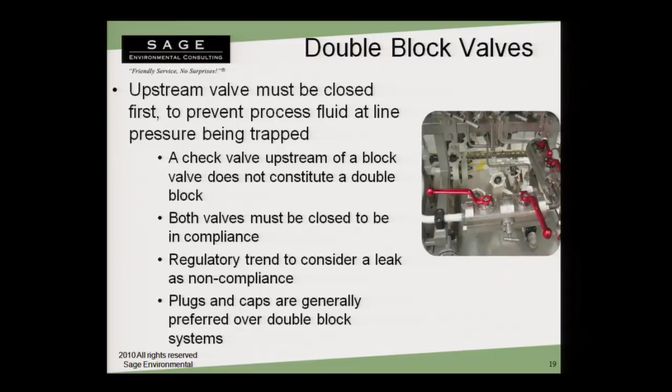The sample systems, we didn't hit on this hardly at all. First off, it's required only for routine sample systems. EPA does not define routine in any of their LDAR rules. Seems an oversight, so that's up to you to do.

Most people say routine means it's a regularly scheduled sample with a minimum frequency of X, and I've seen that X go anywhere from weekly to annually. But there's no doubt that if you have something that's regularly scheduled, but you only do it once a year, you don't need to waste money on controlling the flushing from that.

The other thing that's interesting about this, you're supposed to capture flushing emissions. So by flushing, purging, we're talking about emptying any dead leg line that would not represent current operations.

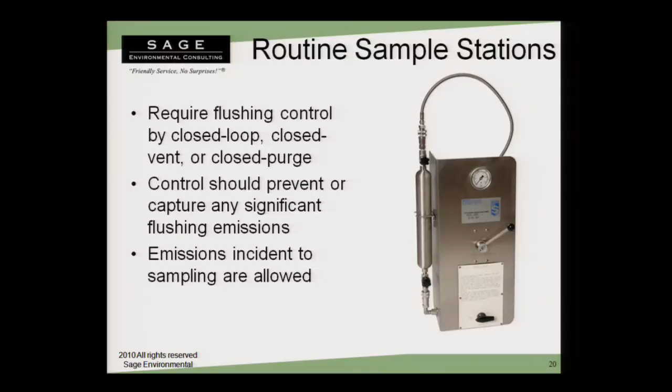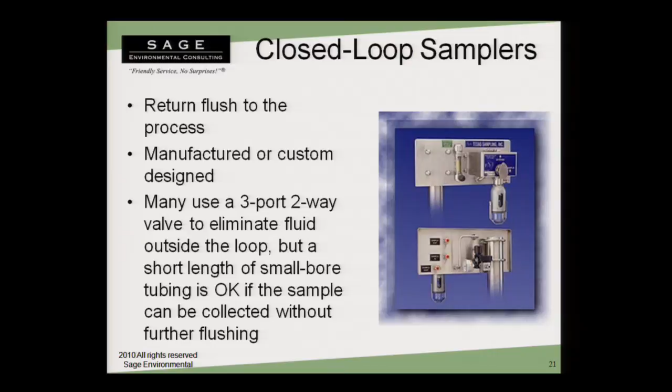So some examples: closed loop, you can get the big fancy panel things, or you can have a homemade one that just goes from the upstream side to the downstream side of a control loop, across a control valve, or across a heat exchanger, discharge back to suction on a pump. Anywhere you got a pressure differential, you can make a closed loop sampler. One thing, we have concerns in a minute.

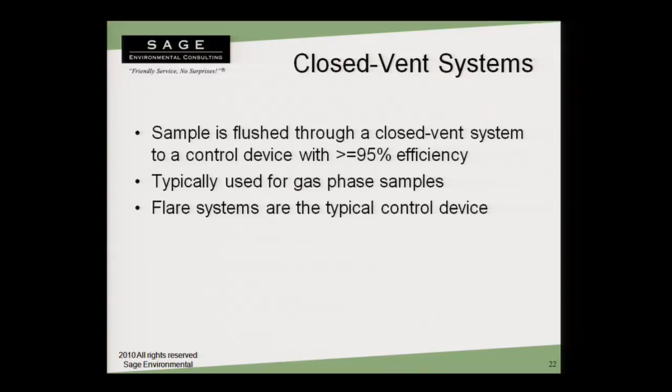Closed vent systems, you're going to flush to a control device. And the vast majority of those are gas samples being flushed to the flare system, so usually with a bomb. So you fit a bomb in place, you flush through it to the flare, you turn off, pull everything apart.

Closed purge means you got some kind of a container that you're going to purge to, and you're going to keep it covered at all times when you're not sampling. Then when it starts getting full, you're going to take it somewhere in the plant and rework it, get it back into the process. So you're going to recover it. So this is allowable.

We like to recommend, if people are going to do it, to at least invest in this kind of foot-operated kind. So you got a hinged lid and a foot-operated deal, which is good. The guy's got his hands full anyway, so he can use his foot for that. But the good part, as soon as you walk away, take your foot off the pedal, it closes itself. An open bucket being used as flushing control is not compliant closed purge.

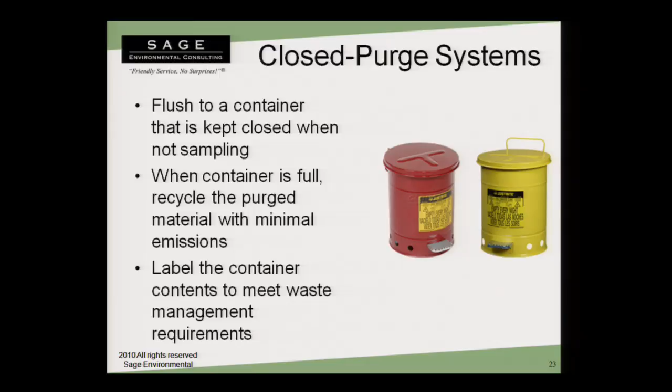So some concerns: bypassing or modifying one of these. One of the things we see is a closed loop system that's doing a good job of flushing, but then they'll put 10 feet of tubing on the branch off the closed loop that's not free draining, and so they've got to flush that. So that's making your closed loop non-compliant.

Purge containers open - the labeling is more a RCRA thing, not for us. And almost all of these sample systems can be OELs, so be sure you take care of that as well.

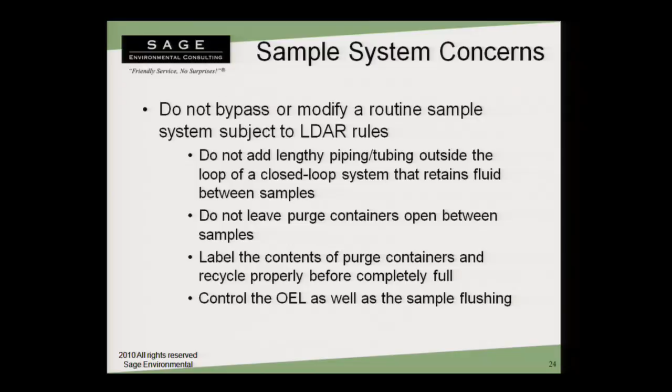Sensory inspections, we tell them: anything you can see, hear, or smell.

If you've got drips, that's a pretty clear indication. Stains or a buildup, gooey looking stuff, it's a little hard to tell whether that's current or a buildup left, residue from some past leak. So we recommend people do the wipe test, grab a red rag and wipe it down a bit and see how fast it redeposits, or if it redeposits. If you stand there for a couple minutes and don't see anything else, you probably don't have a current leak.

AVO, not very often. Ice formations can go either way. That could be an internal pressure drop that causes chilling as you vaporize liquid, but it can also be through a big leak. So it's worth looking at those. Not very often, but occasionally you can actually see a kind of refraction, like the way heat off asphalt looks in the summertime. You get that shimmery look.

And this really came up when we started doing the IR video testing. You get the ones you can see with that video as you're going around it, looking at it from all directions, trying to get the best image. You often find out, dang, I can see that one with my bare eyes, I don't need an IR for that. But you wouldn't catch it just walking through the plant.

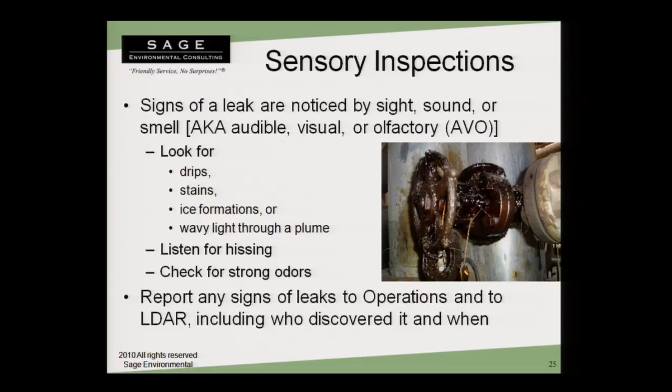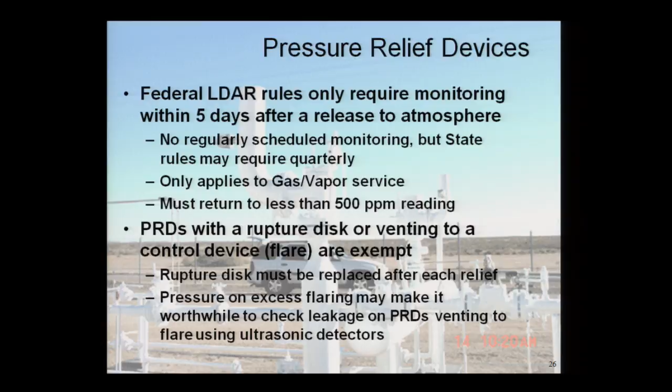Yeah, we can finish this at the end of the day, I suppose. We do that? Looks like we got most people back, so we'll do that. Oh, yeah. I'm a wolfer, I wolfed mine down pretty good. I figured I'd be back in plenty of time, and you guys already got started. Yeah.

Wake up, little Susie. Here we go. Come on. Hey, oh, I went all the way back. Okay. How am I going to get... Oh, that's the wrong one altogether. Ah.

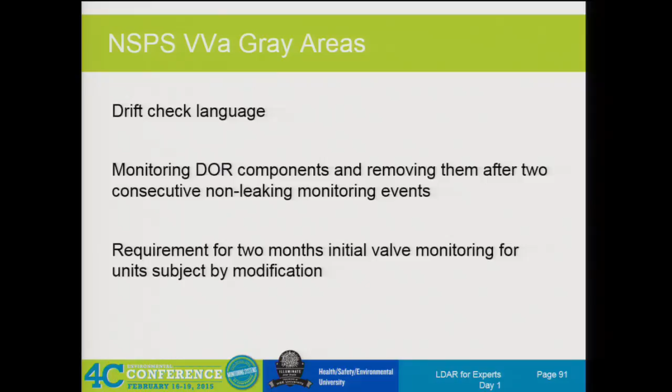Come on, oh. Move that gadget over. There we go. So in the drift check language in VVA, which was copied mainly from the consent decrees - that's the first place drift assessments showed up - we've got: record the instrument reading on each scale, the date and the results. Calculate the average algebraic difference between the 3 meter readings and the most recent calibration value. Divide this algebraic difference by the initial calibration value, multiply by 100 to express the calibration drift as a percentage.

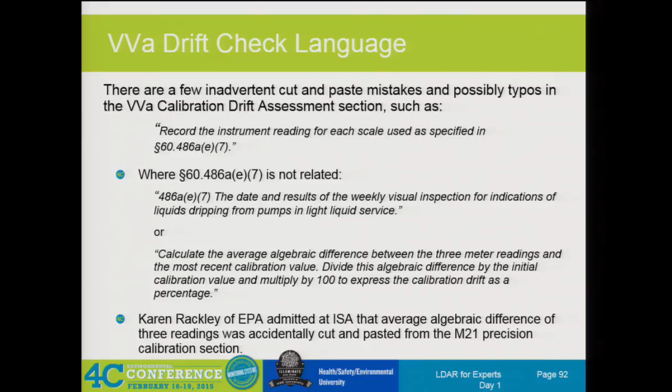Does that sound familiar to anybody? Your quarterly precision calculations, maybe? That's what we do, although we don't compare it to the most recent calibration. Walt Williamson, who was then at BP, brought this up to ISA probably in 2008. And Karen Rackley, I can't remember her new married name, initially said no, there's nothing like that in there. And then she came back after lunch and said, whoops, looks like we had a cut and paste error of some kind on the final document.

We'll get this clarified, hasn't been yet. So what you have to do then is, again, it's one of these 'what's your risk tolerance' situations. A lot of people are doing their drifts in triplicate so that they can do an algebraic average and compare it to their morning number. Does that make any sense? Not really.

It certainly doesn't improve it, because it's hard enough to keep guys from trying to do things to make their instrument pass before they get a reading on it. Everybody wants to come in from the field and clean out their filter, right? You've been doing it all day long on a fairly regular basis, I hope. But the first thing that comes to mind as you quit monitoring and know you're going in to do your drift assessment is clean my filter, okay? What's the temptation going to be if you know you have 3 chances on the drift assessment and you fail your first one by 10.5%?

You're going to start doing something to try to get it to pass on the next 2 runs so that overall you don't have to go back and redo any monitoring, right? Whereas if you're going to do just a single reading, by the time you've got that reading, it's a little harder - you feel like you're cheating more if you were to just say, oh, that doesn't count, and then do something and record a passing result. So I think having the triplicate actually causes you to do more to kind of falsify the passing. The other thing is they tried to give you a break.

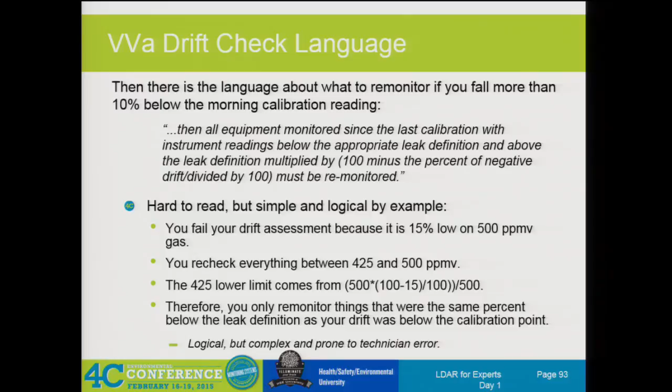So the bottom line: nothing has been changed in the rule, or clarified or corrected, so you've got to decide how you want to do it. Either go ahead with extra work that's counterproductive, or live with a single reading and try to justify it based on the verbal we had in the ISA.

Removing components from DOR - we talked about this a little bit a while ago. They have this thing in there; I just have it as 2 consecutive non-leak readings, but it reads 2 consecutive monthlies.

There was a rumor for a while that if you use this to pull a component off delay of repair, you couldn't put it on delay of repair again if it started leaking and you weren't able to repair it online - which might mean you'd have to isolate part of a unit or shut down part of a unit, derate it, do something really extreme. There is no language that indicates that. I don't know where that interpretation came from, but I've heard a number of people say, well, we're not going to use it because of that.

This is one. Some people say, well, my database won't let me retire a leak unless I have a repair type and a passing reading. And what do I put as a repair type? One I like to recommend is 'delayed effect of previous repair attempts.' We didn't do anything right now - we did something a while ago, and it finally got there. It weathered off, everything that squeezed out or whatever.

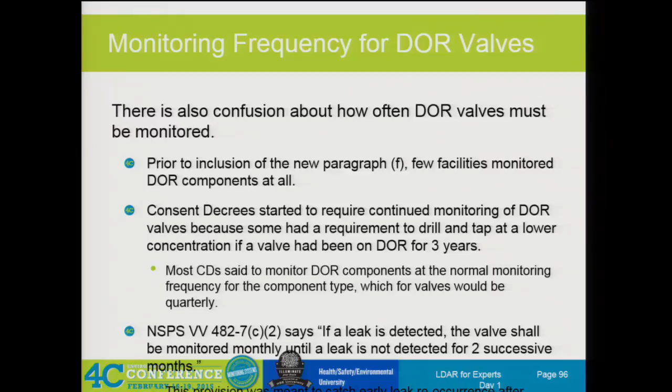Initial monthly valve monitoring. We were talking earlier on another one of these things.

We mentioned this Detroit letter that came out, which needs to be struck out now because I think it has been added. Is that right, Chris?

That ADI letter on the Detroit initial monitoring? I think it has been added, but I'm not positive of that.

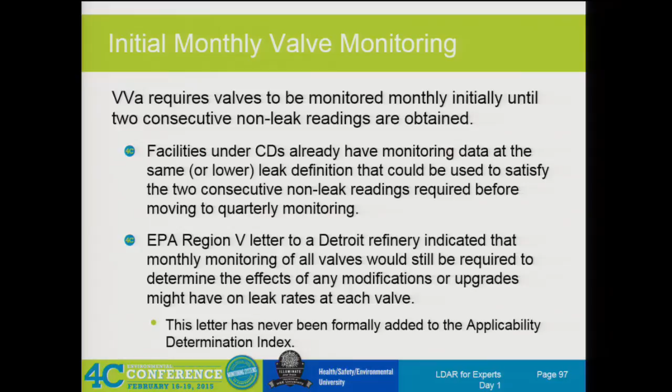Now we've got HON. This is one of the cleaner of our rules, but there are still a few puzzling things in it. It's the one and only regulation that has a repair threshold different from the leak definition, and they have that only for pumps.

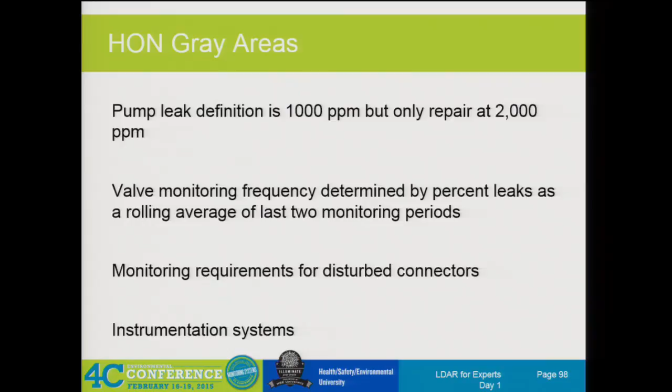We've got a valve monitoring frequency determined by percent leaks as a rolling average of the last two monitoring periods. We've got monitoring requirements for disturbed connectors, and it's got instrumentation systems, which the only surprising thing about that is why we don't have it in all the other rules. But it is a little bit quirky and unusual.

So the pump leak thing, the leak definition is 1,000 unless you're a polymerizing monomer or food grade. But you only have to repair at 2,000. I'd ask why the difference, but it's already there, so you guys can read.

They had this quality improvement thing. This was actually EPA's first and very feeble attempt at low leak technology.

What determines that? Is that you saying that you're a food grade manufacturer, therefore your pump is food grade? Or is it something else? I would say if your product is regulated by FDA.

Okay, for the industry. But you might have some non-food grade pumps within a food processing facility, I guess. I don't know, to tell you the truth. I doubt seriously anybody is going to challenge you if you designate it that way.

That's the first time I've seen that somewhere. I don't recall seeing it in the common practice for our products, or a lot of our facilities when they manufacture food grade materials.

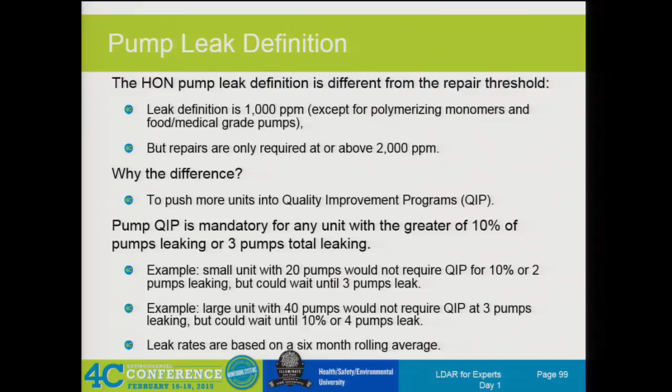It looks like they were doing you some kind of favor to allow you to go to 2,000 before you repair. But in the end, what they were doing was helping you get into your QIP faster, which would force you to upgrade pump seals and so forth.

Then we got the performance-based monitoring. So if it is over 2%, you go monthly monitoring or QIP, 1 to 2% quarterly, 0.5 to 1 semi-annual, and under 0.5 annual. They proposed in the uniform standards an under 0.25 that would let you go to biannual or biennial, whichever it is, it's every 2 years. So they're still looking at maybe extending it further.

EPA likes this approach much better than just staying under 2% for longer and longer, as in the NSPS skip period. All of these percents are based on a rolling average of your last 2 monitoring events. Okay? That means it could be your last 2 months if you're on monthly monitoring. It could be a month and a quarter. It could be last 2 quarters, a quarter and a semi, last 2 semis, semi and an annual and a monthly if you triggered back.

There's all kinds of weird combinations that you could get, and that's a pretty hard one for the database to do and get right. And we don't run it. Most of the consent decrees early were in petroleum, so we don't have a lot of HON units, but where we did go into those and hand calculated the rolling averages, we found several mistakes in monitoring frequency almost every time we got into that kind of detailed check.

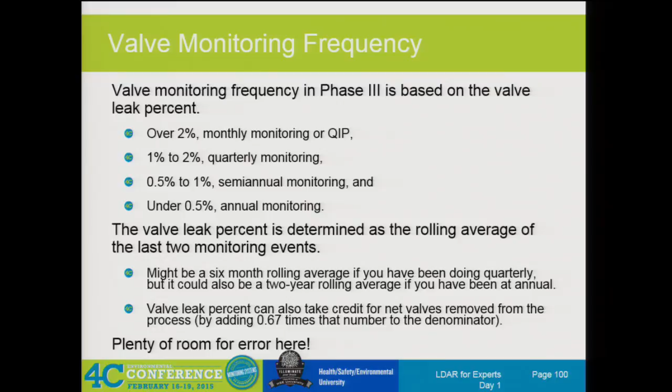So this is something where they were trying to give you a little break. Because the idea was, any one time you go out, you might hit a spike. Maybe you've had a little blip in the power, some extreme thermal conditions or whatever that's caused this. And we don't want a one-time event to force you into more frequent monitoring. So by going to the rolling average, if you were lower before and lower after, then your rolling 2 event would round that out and keep you at your steady, correct monitoring frequency. But in effect, it makes it so difficult that you can often get on the wrong monitoring frequency.

8 years on connectors, yeah. Yeah, we are. And you can get out to 8 years on connector monitoring. Yeah, I think it's the same. I think it's a rolling average of the most recent 2. There's some consent decrees that have a low leak technology requirement for 2 out of the last 3. I don't recall anything, but I haven't looked at it in a while, so I wouldn't guarantee it. I always go check when I get one of these. It's a little bit outside of what I see daily.

This one goes to connectors, and it's got a requirement that says each connector that's been opened or has otherwise had the seal broken shall be monitored for leaks when it's reconnected or within the first 3 months after being returned to HAP service. If you knew it happened, it would be easy to get somebody out there in 3 months to check it. The problem is, how are you going to find out about these?

Somebody rolls a blind, open, close, and back again. That's 2 disturbances to that flange. That's not going to go on MOC. It may be somewhere in an operator's log, and you could try keyword searches if that's an electronic thing. If it's a hard copy one, forget it. You can go in there, but it's just darn hard to find it. But there is a way to get around the whole thing.

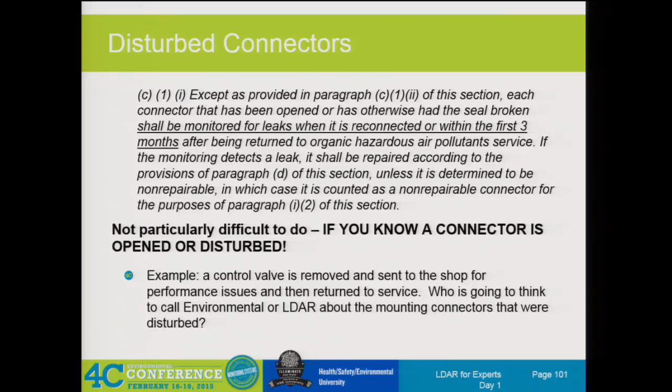So it says here, in the area that talks about how you calculate your connector leak percent, that as an alternative to the requirements in paragraph C1I, which is the one we were just looking at, an owner or operator may choose not to monitor connectors that have been opened or otherwise had the seal broken. In this case, the owner or operator may not count non-repairable connectors for the purposes of I2 of this section.

So you've got leaks from previous monitoring periods that are still leaking as you go out now. And the way the connector calculation for each period is set up, you can subtract off those non-repairables from a previous monitoring event from the total, which would include the ones you find now and those previous ones. So that will give you a lower percent leak and potentially less frequent monitoring. But if you choose to take credit for the non-repairables, then you have to do the 90-day, 3-month follow-up on the disturbed ones.

In most cases, I think I would prefer to monitor a tad bit more frequently and not have to worry about how many of these things have been opened and I don't know about it. Of course, it's one of those that's going to be really hard for auditors. If it's hard for you to find out about it, it's going to be even harder for auditors. And there's many things like that.

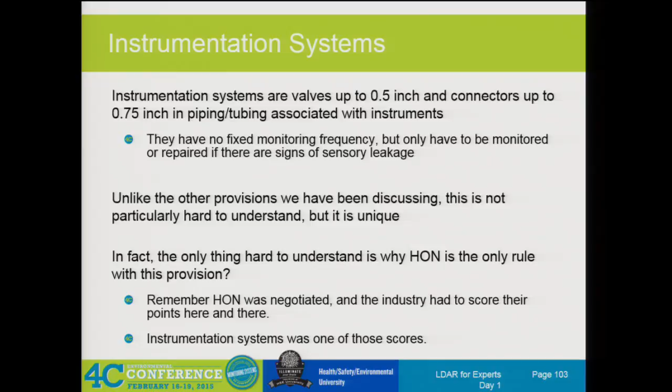In the proposed uniform standards, this was one thing that was kind of a benefit that they had the potential to make available to all rules. But that was going to be a menu thing. They were going to have to go back and revise each original rule and say, you will now comply with VV by complying with this and this paragraph out of the uniform standards. So they still had the option to include or not include this thing, and we don't know, never will know, I don't think, whether we would have gotten any benefit out of it, but that's that.

Okay, refinery MACT, we're almost done. Gray areas. Compliance date for a new unit and modified HON. We talked about a lot of compliance stuff on VV. The refinery MACT, subpart CC, is actually even more. You go to the section that has the equipment leaks, LDAR stuff, section 648, and there's nothing about compliance date. And this is kind of like HON, it's got tanks, loading racks, miscellaneous process vents, a lot of other things in it besides the equipment leaks. You have to go back to the general introduction, and that says that overall, refinery MACT compliance calls for compliance by startup.

We thought that 30-day letter was putting our feet to the fire. Now what? We've got to be in compliance with LDAR by startup? I had to start getting creative then. If you go to the equipment leak section, there's some applicability and definitions, and then it gives you the options of either complying with the requirements of VV, no, it's not VVa, it should have been a modified HON. I don't know how that got in there twice. That's your two choices. Go to VV or a modified version of HON. Both of those allow 180 days compliance time. So if you're complying with one of those referenced rules, then you're complying with MACT. So that's the only way to rationalize.

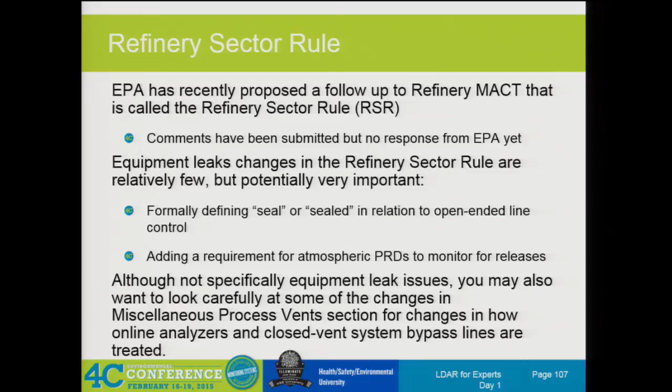Briefly mentioned while we were talking about the OEL deviation thing, this refinery sector rule is mostly not LDAR, but it does have that OEL issue in it. And it's also got more requirements for monitoring atmospheric PRDs, which is kind of an LDAR deal, but it's on the edges of it. Not much there. All of the deadlines for comments are already over. That went into like November or so, I think. And so there's not much need to dwell on it now. They haven't come back and finalized it. So maybe by next year we'll have something to say about what actually happened there.

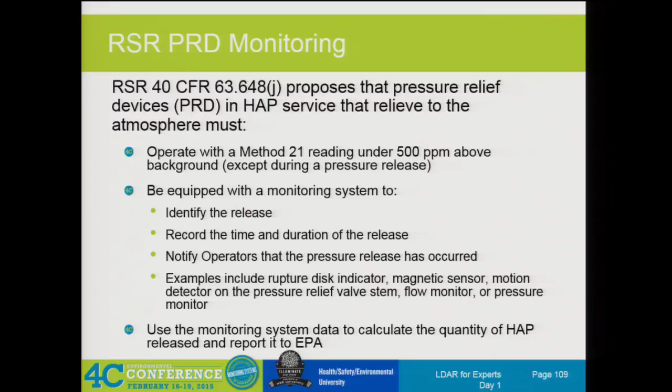And these are some of the most recently added gray areas that cut across all the rules. The first one we're going to put on here is isolation of a leaking component, to stop the clock. Okay. How many of you in here have heard of or are practicing stopping the clock on a 15-day repair cycle? Any hands? One? Yeah. It's been part and parcel of LDAR since day one.

And the thought process is the reason for putting a deadline on your repair is that the longer it remains leaking, the lower the overall repair effectiveness of the program is. And in fact, there's a table that says if they made you fix it within 1 day, your overall program would be about 99.9% effective, and it would reduce emissions by 99.9%. 5 days, 99.3, 15 days, 97.9, and 30 days, 95.9.

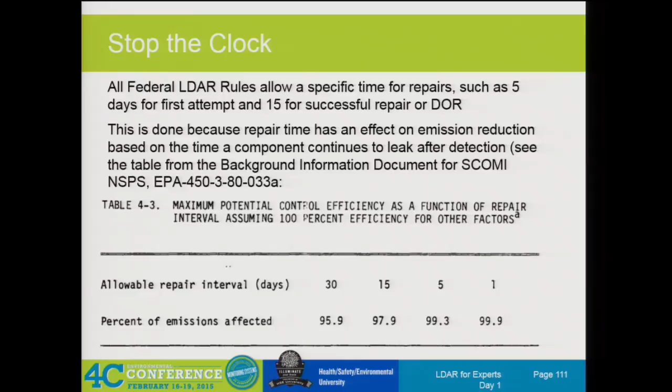So they were looking at that, and they weighed those various options, thinking about all the different equipment types and how involved the repair is, and specialized personnel you have to get out to do some of them and so forth, and decided that in terms of getting a reasonably high emission reduction without creating an unworkable time period, 15 was the way to go. So it's clear from all of this that the 15 was based on how long we would accept the leak enduring, okay?

So if you haven't repaired the leak, but you've stopped it from leaking by isolating it, you shouldn't have to count the days in which it's not leaking, because the 15 days were meant to minimize leakage, right? If we've got it effectively isolated, we've effectively stopped the clock on the repair allowance. And this is kind of important because they also changed the definition of repair. It means whatever action you take to minimize or eliminate the leak, and monitoring with a reading below the leak definition.

So if you isolated it, put it on DOR, that's the easiest way to track it as isolated, and the clock ran out, then when you put it back into service, you'd be immediately out of compliance, because the clock has ended and you haven't completed repair. You've done the physical action, but you haven't had the chance to monitor it. You're probably not going to be standing right there as they open the upstream valve and stick the probe down there. Maybe you could claim you sneaked into compliance that way.

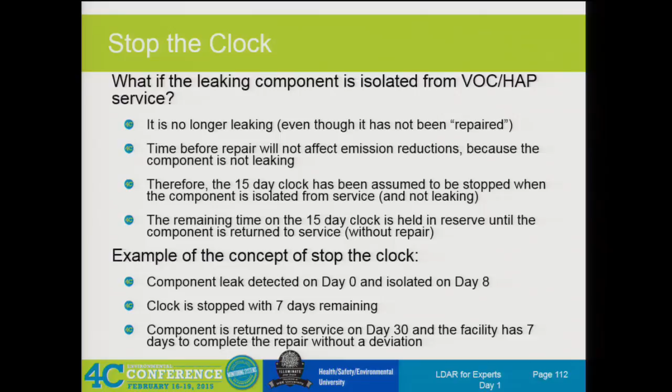Well, it seems if you have a component that's leaking, you try to fix it, but the 15 days haven't run out and you can't fix it. So you isolate it from service and place it on delay of repair.

There's actually two ways to track it. You can place it on delay of repair, or you can mark it temporarily out of service. I much prefer and recommend delay of repair. That's reason number 2 in the list of 4 things that would allow you to put it on delay of repair, and there's a lot more.

You've got a sheet, a form you fill out, people sign it, there's recognition of what's going on. Whereas TOS is more like telling your database administrator, hey, click this thing over as temporarily out of service. Or sometimes the technicians can do it in their handheld, and it comes in that way when you load it back up. So you just don't have as fine a set of documentation to support what you've done through TOS as through DOR, I think. Although, again, there's nothing anywhere that says you can do this, much less how you should document it.

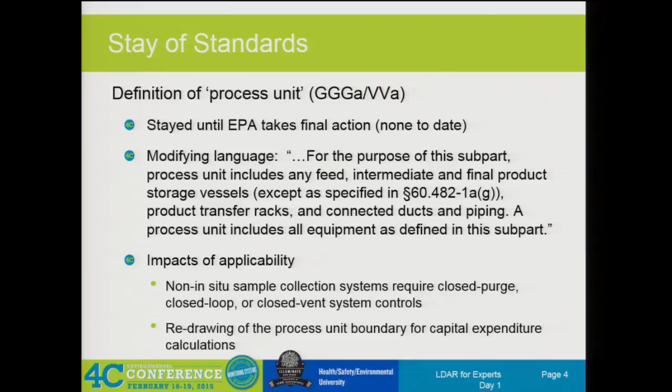This has also been stayed. Let's see, capital expenditures - added that definition, also modified what the effective dates for those would be.

These are going to be important when you're talking about your modification calculations to trigger into these rules, which we'll do some of the calculations here in just a minute.

Who tracks the applicability of your unit? Is there a permit engineer, somebody that's basically giving you guidance saying, hey, this is going to be VVA, you need to go ahead and do it, or we're going to modify into it, or are you having to be proactive, looking at your component counts, figuring out if you're replacing 50% of it, which you figure out through capital expenditure, but modification means tracking MOCs, number of components you're adding.

If you don't really know who those people are, who's tracking, especially modification, it's probably something to be looking into pretty quickly. Because the older the unit is from the initial construction date - let's say it's greater than 55 years - effectively adding one component would trigger modification. One net component. So if you're doing replacement in kind, something like that, doesn't really matter. And obviously there's a big difference between reconstruction and modification, which we'll get into.

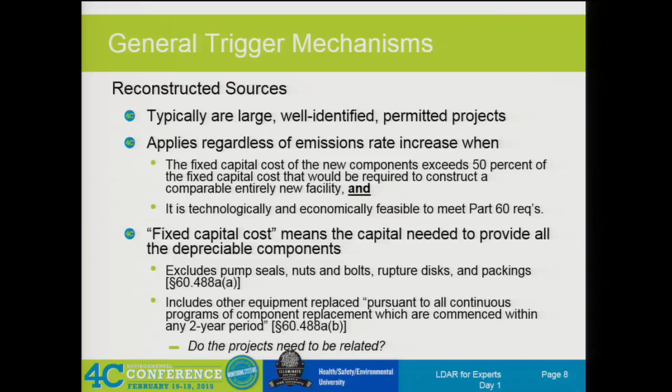And if you're constantly increasing, that's one of the things EPA looks at when they do a 114 request. Anybody not know what a 114 is? Under the Clean Air Act, the EPA has the authority to basically request information, and it's non-negotiable. They have some leniency on timeframes for when you can get it back. If it's in the middle of a big compliance period, you can say, give me 2 more weeks, and they'll probably say okay. But at that point, they can request anything.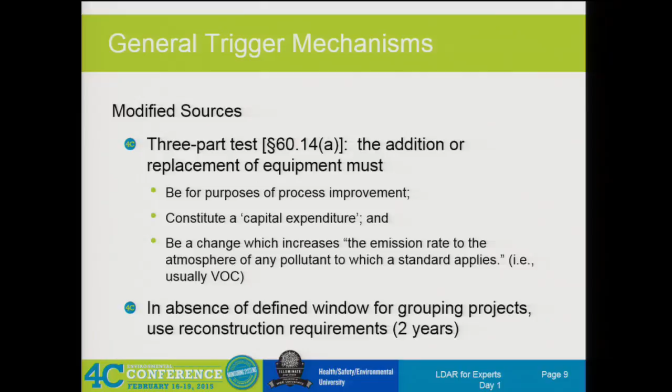Everybody hear his question? Okay.

Again, capital expenditure, under Triple G-A you can exclude your compressor as its own unit. So you can just say my compressor's it, and everything else I don't have to do this capital expenditure for, if you want to isolate the two. It's completely fine doing it.

There's no issues there. You might want to talk to your permitters because that could change how permitting's done a little bit. Under your Title V, you might have just the unit, and then you're adding in a compressor underneath that unit as something completely different. So there might be some updates that have to occur, but that's probably fairly easy to do, although I don't think revisions take too little time. I think it's quite a process.

There's so few of them, unless you have some pneumatic pump or something that's fairly cheap compared to a big centrifugal. One good thing too, if you have a component that's basically a sealless system, like a mag drive pump, that doesn't have an emission increase, you would not count that in this capital expenditure calculation.

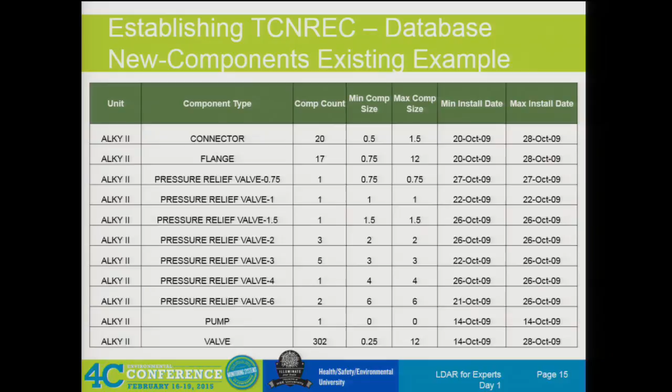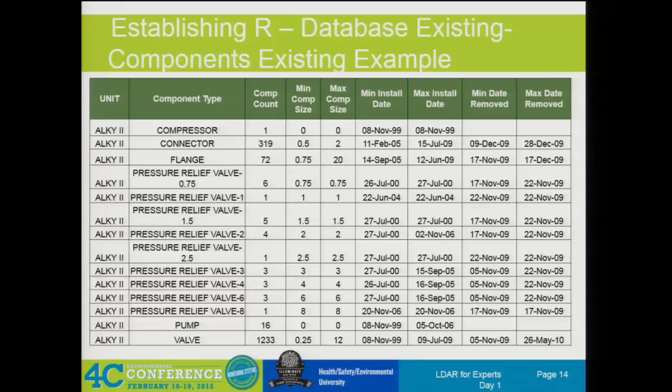Nope. Anyways, this will shoot out whether or not you become subject.

And this, like we said, can get very complicated. If you want to do a cost per single component, it's going to get excessive real quick. You're better off just lumping things together. If they're within $100 or even $1,000 of each other, just throw it all in the same cost. It'll give you a rough napkin-based calc that, if EPA or somebody wants to dive into, it's going to take a lot of effort and a lot of time to get into the nitty-gritty of what that would cost.

Any questions on capital expenditure?

Just to reiterate, don't forget the components in heavy liquids that are not traditionally in your program, the ones you don't have inventory for. Those have to be in there as well.

Replacement in kind, things like those, possible impacts to the process unit. It's really vague. If you do define routine maintenance, I'd write that and try to do it uniformly within my organization, or have some uniform guidance on what routine maintenance is.

Anybody field operators in here? You were. Routine maintenance, what would that be? It's pretty much just, once the equipment's in the unit, it's maintained by routine maintenance. You know what I mean?

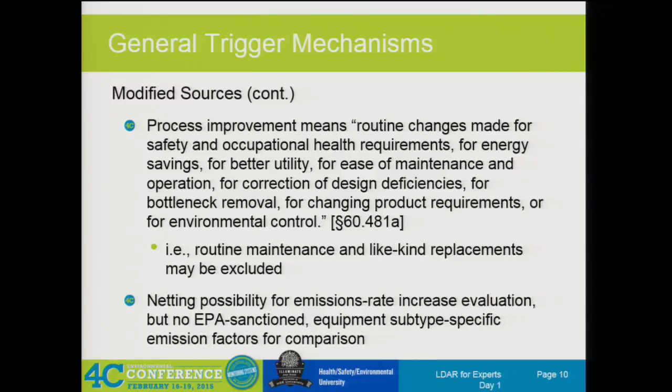We have any regulation geniuses in here? How about really good with regulations? Who can guess what the compliance liabilities are for VVA, GGGA versus GGG-VV?

If you're under consent decree, I would say next to nothing other than some record keeping. But overall, they're very small. We only have a few slides on this section.

Oh, well, that's not going to work.

So we kind of lump this into a couple of different categories. We have direct cost and emissions. Basically what we're going to do here is look at emission reductions based on the new requirements, so if we do this, would we see an emission reduction, which is the whole reason to have these regulations triggering to a more stringent rule. And then compliance liability, which is really a catch-all for record keeping, all the little nuances that you're going to have to keep up with to demonstrate compliance.

Our scale goes from -10 to +10. If it's negative, there's really not a problem at all. If it's positive, it means there will be an increase, whether that's in the emissions, the compliance liability, or cost. So for instance, a good example would be on the liability side.

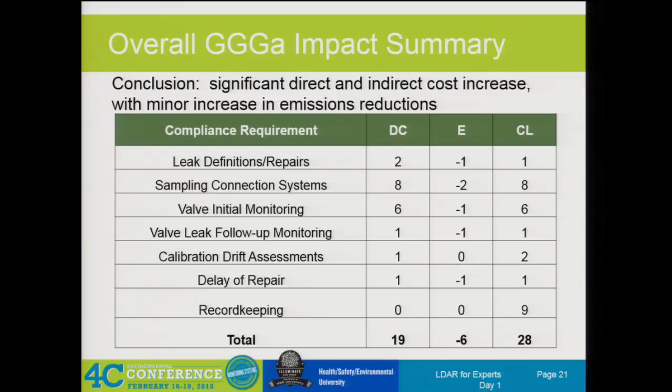And then record keeping. Again, like we were saying, there probably is a direct cost because that takes somebody's time. A little bit harder to quantify when you're talking about just maintaining records, reporting, things like that. But the things that they did add do have a lot of compliance liability. And again, you're not going to see any emission reductions from killing trees and consuming computer energy. Should be an increase here. And that's going to be basically the compliance liability.

Anybody have any questions with the triggering and what that would kind of look like? If you have a consent decree, you're pretty solid. You're already running at a 500 or something. If you're HRVOC, you're South Coast AQMD, Bay Area, you're already running low leak definitions. So you're not going to have to worry about too much. You're just going to have some record keeping items to take care of. I think some people are looking for consent decrees. Those are coming up.

If I lose my voice, I'll tag in Buzz. Is this echoing? To anybody? Okay, it's in my ear. It's definitely there. Let's see if I can get this working.

That's unfortunate. Anyways, we'll go over some recent consent decrees and ELPs. Who's not subject? Let me ask that question. We got one that's not subject. Okay. It's probably more applicable to y'all. The folks that already have it, you might want to be paying attention more towards the termination end, and also kind of what the recent trends are going to be if you're not subject or keeping up with it.

So we'll talk about the historical context on the EPA's chemical and refining CDs. Kind of the paradigm shift that we're seeing. We've all kind of been aware over the years how EPA's changed and added in a lot of low leak technology, things like that. And then overview of the more recent ELP requirements. I don't know if it said it. Yeah, Enhanced LDAR Program is ELP for those that may have questions about it.

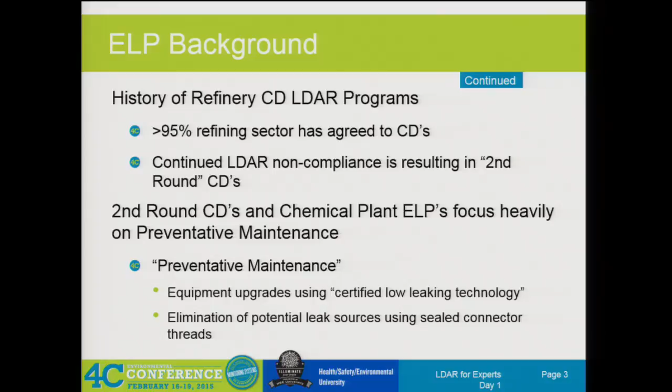Apologize, these aren't actually the updated set of slides that I've made. This really should say 2015 and where we're going. So all the refineries are pretty much hit pretty hard. EPA may be going in now and again and verifying that they're in compliance with their consent decree. But at the time, they're not really doing a lot of traveling and visiting the sites. They will do the 114 requests and basically track a lot of things through the database.

Later on, either tomorrow or Thursday, we'll talk about why they prefer the database route versus spending money and going in the field. But for now, we're going to land on this. Big focus on chemical industry. Who can guess what the ratio of chemical plants affected to LDAR versus the refineries is? Somewhere around 10 to 1. That's a lot of opportunity for EPA to come in and do some investigations for non-LDAR compliant facilities, consent decrees, get the emission reductions down, which is why we're seeing a lot more pop up.

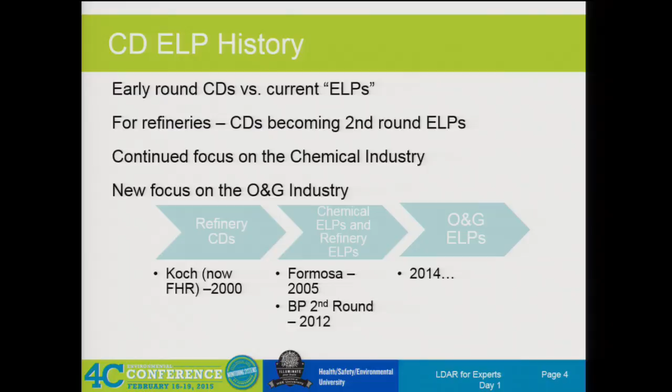And now the oil and gas industry. Triple K facilities for a long time kind of went underneath the radar. There's even more of those than probably chemical plants. There's some in negotiation at this moment. So it's on the horizon.

Some of the big things that we are seeing, as a general classification, is an expanded LDAR personnel definition. So basically right now they're saying everybody who has an impact with the program is going to be LDAR personnel. Some of the older ones were basically monitoring technicians and operations, pretty isolated. A lot of the background of why that happened is there's so many people that actually do impact the program. So if you've got some maintenance group that does the maintenance on the equipment, but it's not considered part of operations, which the other definitions would have required training for, then they may not be on the same page. They may not know that you need to notify LDAR immediately to go get things repaired or that it has been repaired.

So it's just an expanded definition. One of the reasons why that really is a big issue is just for training requirements. Who has like a generic LDAR training for anybody to get into a site, or their specific site? Got a few, yeah, quite a few people are going to that approach. We're saying, hey, regardless, we're covered. We're going to have people come in. They're all going to have some sort of introduction. Generally, it's something soft. You see tags, tag box, opening the lines, you see a leak, tell somebody. But keeping it very simple.

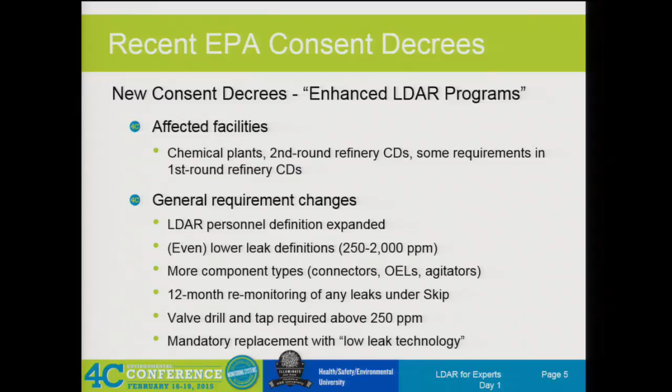Mandatory replacement with low leak technology. Do we have a site under any low leak requirements? Got one? Okay. Any sites that are subject to replacing components with low E? Legally required, not voluntary. Okay, we'll get into some of the gray areas and really how that becomes a huge impact. A little bit of continuedness.

Certified low leak technology, there's a bunch of different definitions out there. Generally, it's just a guarantee that a component's not going to leak for a period of time under a certain ppm, whether that's going to be valve packing, the valve itself, or other type of components. Some of the additional requirements they've added is the replacement of existing equipment after turnarounds, and in this case, up to 10% of the valves. Some of them get pretty complicated with how many you actually have to do based on what's being affected, how big the facility is.

That one gives me a little bit of heartburn. What's the average leak rate probably in the room? Anywhere from 0.5% to less than 2% probably, I'm guessing. So conservatively, we can say 98% of your stuff probably never leaks. It never has in its entire life. Replacing 10% of that seems a little crazy.

But that's some of the language, if you're not careful, that gets added in there where they don't limit it to just the stuff that's leaked previously. And some of them, they've said, if it leaks twice within a certain period, you're going to replace all those. It's well and good. I completely understand that. Things that leak typically leak more than once over a period of time. And then we have the connectors. Anybody have a low E connector? We got Flexitallic, and I know they're not going to give you a guarantee. Some of the other ones probably not either.

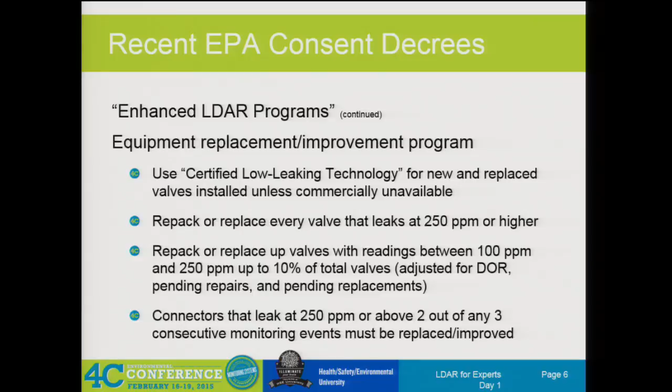General requirements. Anybody have directed maintenance? Repair verification, same time as the inspection. That's a bit of a hassle. Some of them do the quasi, which gives you 24 hours to come back after they do the repair, which makes a lot of sense for the most part. If you're out there working on the valve, you're kind of squeezing the guts out a little bit, you could get a high leak if you're immediately doing it. And you could be there for a while with the directed maintenance.

A lot of enhanced QA/QC. They've increased the stringency of the audit frequency. That one I feel like is quite negotiable for the most part. If you're good with every 2 years, they may keep you on that cycle if you've got an existing consent decree. If you have a new one, I still think that's one of the areas, as long as you're doing them. Not doing them is not negotiable, but the frequencies should be something they'd be willing to work with the site on.

Expanded record keeping and reporting, a lot of that comes in with the low E side. So you're going to have to demonstrate that you're in compliance with the low E stuff, especially all the new equipment being put in. Replacing, you can tie it to the repair record, but initially tying all the new stuff into your database can probably be a little bit of a challenge.

Also getting the groups to communicate. Working with the site now, they say they have these approved vendors, but the components they're installing are not on that list. That's because there's a big disconnect between procurement, operations and engineering that are installing this stuff, and the environmental group. So when you're doing the record keeping, you're really having to tie in an entire process just to ensure you have the records to say these are certified low leak technology components.

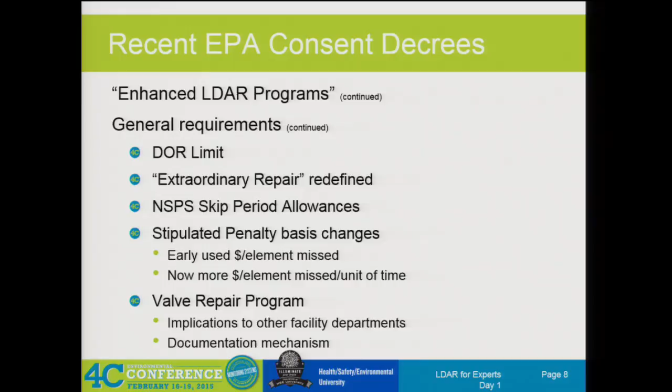Excuse me—valve repair. We've kind of covered all those with the documentation aspect.

Let's see, some of the more recent ones—I think Flint Hills was last year. Any Flint Hills people in here? Port Arthur? Not Port Arthur. They settled theirs, I think that was last year, early last year, about February this time.

You know, kind of an overall summary—includes BWON, flares. Let's see, they did add in VVA. They have your HON and MON units.

Let's see, DuPont in West Virginia. A lot of the stuff they noted was failure to monitor pumps, valves, and connectors. That could be from having those tagged in the database messed up, or just not having them in your inventory when they should have been, which comes down to applicability and speciation—other things we'll talk about later on in the training.

Let's see, failure to identify and report equipment containing HAPs. I kind of think that falls underneath this category, but they line item it individually.

Open-ended lines—who's got no open-ended lines? Yeah, it's LDAR—there's always going to be a non-compliance event, especially with open-ended lines. Unfortunately, we're in the position where we just find them and get the ding for it, but we have nothing really to do with them.

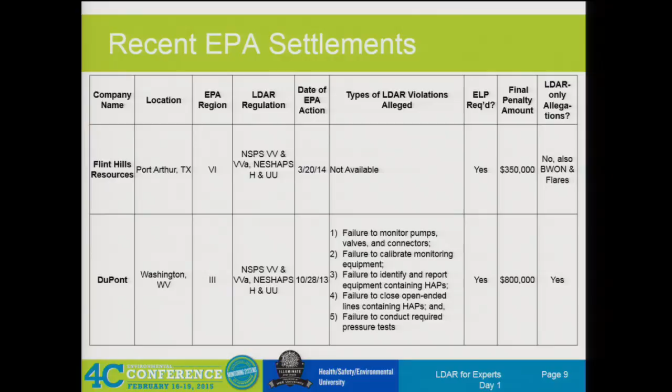Country Mark has theirs. Any Country Mark folks? I don't think so. Okay, open-ended lines, again, performing method 21.

A lot of the audits are driven with comparative monitoring. You're not going to find probably an audit requirement without comparative monitoring. And the reason why is most, if not all, the consent decrees are driven from non-compliance with method 21, on top of overlooked components and things. But having bad monitoring performance is what initially got the whole ball started early on with all the refineries.

You know, some of these are pretty soft - failure to tag a leaking valve. It says leave a weatherproof tag with all the information on the valve. Not really hurting emissions, but it is a compliance requirement that if you do have one, HRVOC specifically does reference that as well as one of the things to look at in their audits. Any current leakers, you go look at their leak tag to make sure they have them.

In all the years I've done audits, I've found one instance by accident where it was a leaking component that did not have a tag on it. It's not something I'm going to go out and look for. I don't really feel like it has a huge impact on the environment, but it's something that they can do.

Again, failure to identify all the components - probably do a root cause analysis. That could be bad P&IDs, bad communication between engineering and operations, or engineering and environmental, or just environmental. A lot of different things can go in there.